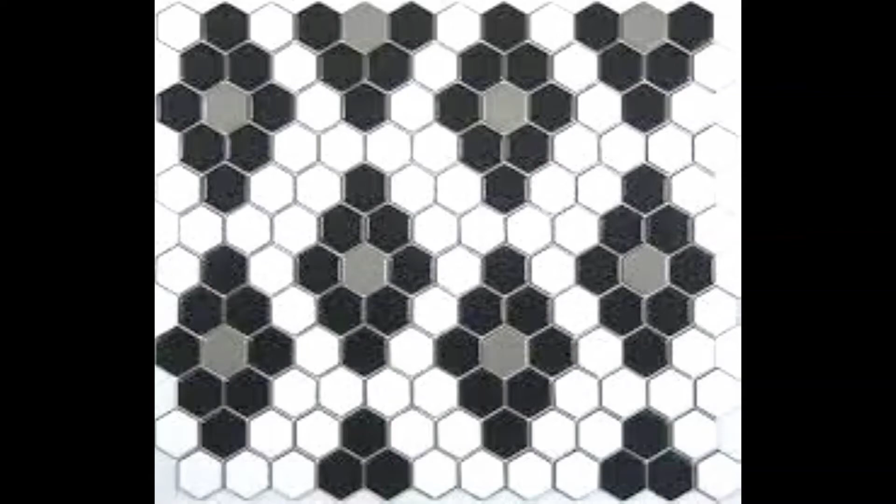In this video, I will be going over this tile pattern and how to recreate it. Our drawing here shows us that we're going to be using a certain command that is called the rectangular array command. This rectangular array command, remember, helps you to duplicate an object or a pattern without having to use other commands such as copy. It also allows you to get through your drawing a lot faster.

Before we can even use the command, we need to create the octagon pattern or shape that we see on our screen here. Now you can create this pattern one of two ways. You can use your line command, or you can be a little bit faster and use your rectangle command, which is the command that I'm going to choose to use. Because I see overall it does have a rectangular shape, but then it has these slashes that are about 1/4 of an inch at 45-degree angles on all four corners if this was a complete square. 1 inch vertical and 1 inch horizontal.

So I'm going to go ahead and use that rectangle command and pick a spot on my drawing screen, and my length is going to be 1 inch and my width would be 1 inch as well. When I do that, I create my rectangle. Now from here, you can choose to either leave it as is, or you can select it and explode it to separate it. So that way you can go ahead and use your chamfer command so that we can put those angles on all four corners.

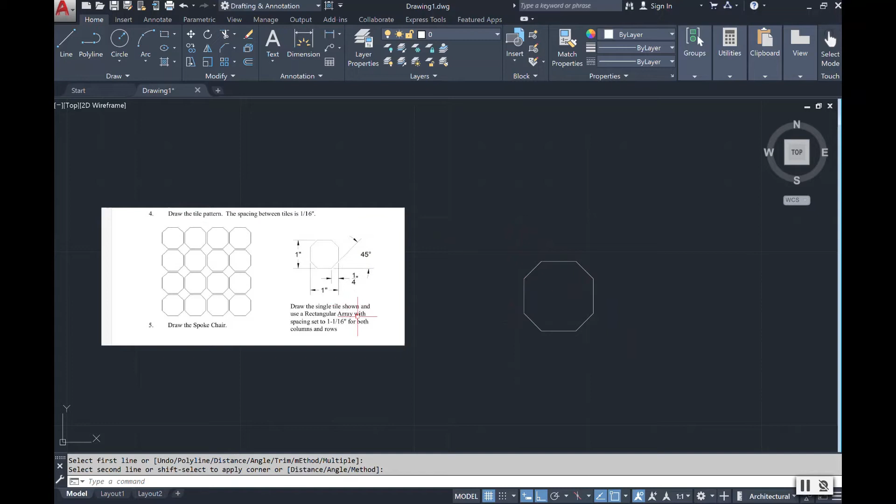Once you have gone around all four sides, and this is the slower way to do it, you can have your shape that duplicates what we have in our instructions here. Now, we can multiply this numerous times. We can go ahead and copy this, or we can offset this as well. But instead of going through all of those commands, we can just simply jump right into the rectangular array command.

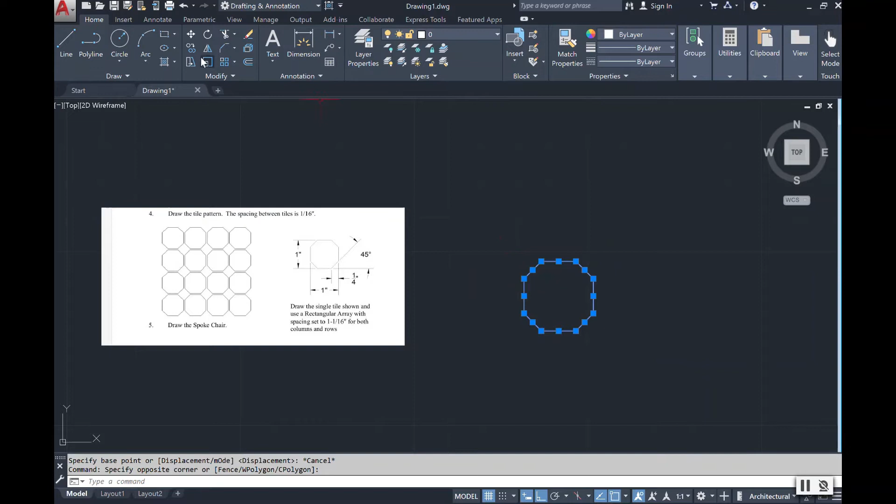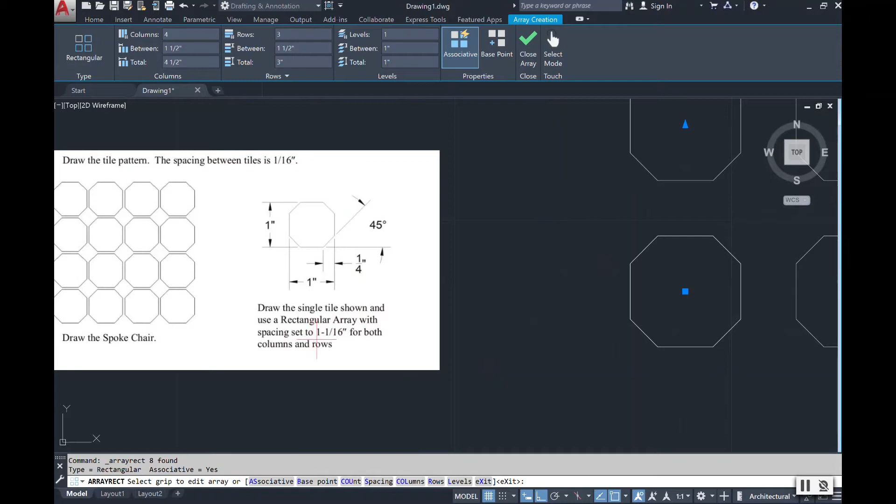And what you would do is select your object. Go to your rectangular array command, left click it, and as you can see, it populates and duplicates on your screen immediately. Now our instruction tells us rectangular array with spacing set to 1 1/16 of an inch for both of our columns and rows. Looking at the top of my screen, this is where we place our columns and rows. We can see that it gives us 4, which is the default for our columns. And then for the rows, it only gives us 3.

But if we're duplicating what is found here, we can change our rows to 4 as well, because we can see that we have 1, 2, 3, 4 rows. So I'm just going to make this change up top to 4, press enter, and now scrolling in and out of my drawing, I have 4 columns and 4 rows. But now we need to get that spacing down. We said that our spacing is 1 1/16 of an inch for both the columns and rows. So this here, where it says between, is that spacing.

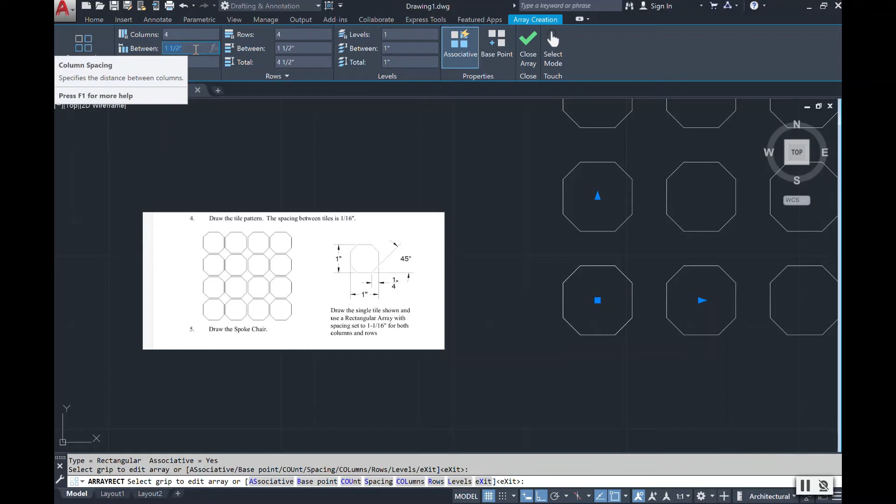So we're just going to type in 1 1/16 of an inch, press enter, and notice that our columns came closer, and now we need our rows to be closer.

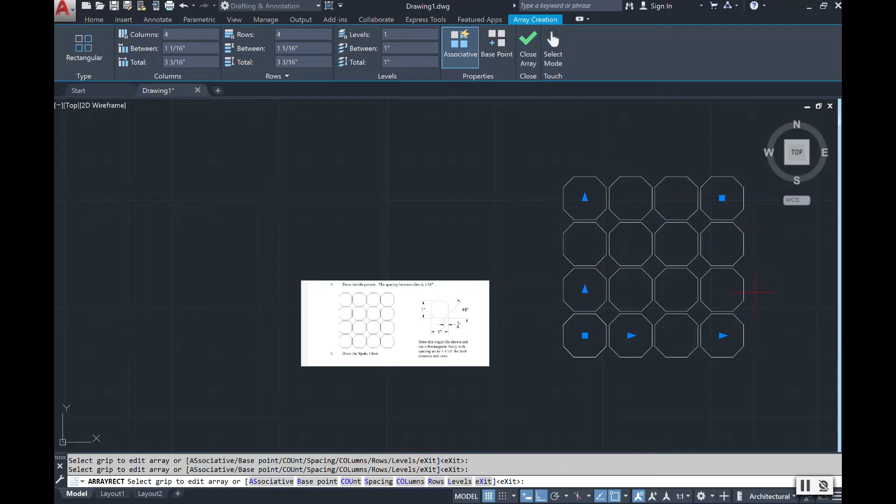So we're going to go in here and manually type in that change, 1 1/16 of an inch, pressing enter, and see how the drawing automatically jumped to what it needs to be. Once you are all complete, you can go ahead and press right click and then enter, or tap enter to come out of the command, and you have your finished product.

Now that we have this tile pattern drawn, I want to show you another way that you can achieve this pattern. And notice the difference. I'm just going to move this out of the way here. Notice the steps, but also notice how long it's going to take to create. We can still do it fast in the beginning, but repeating these patterns can be a little tedious without using that rectangular array command.

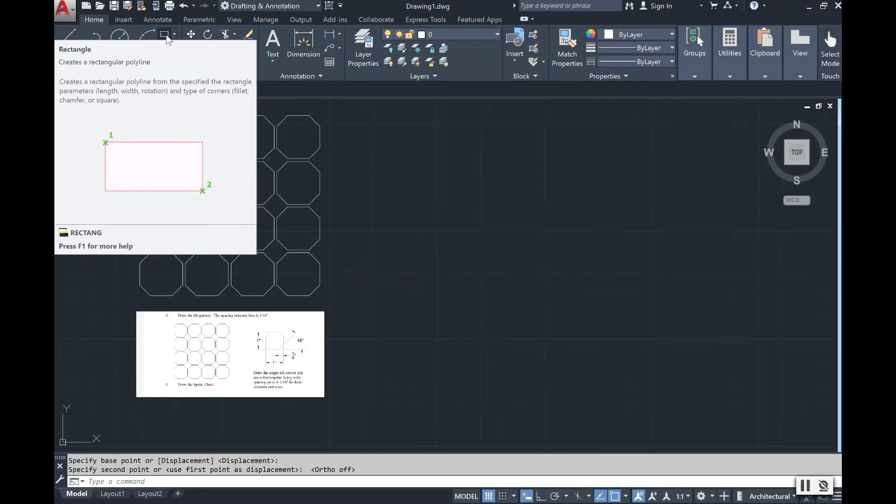Again, I'm going to select my rectangle, pick a point, and I'm going to type in that dimension, 1 inch for the length and then 1 inch for the width. So I have that rectangular shape to get me going, and I can jump immediately, without even exploding this and breaking it up, to my chamfer so that I can put those angles on.

My angle is still the same. The length is 1/4 inch, and that angle line is 45. Pressing enter, and I can make my way around my entire drawing. Again, I'm just staying in that command by pressing enter to come back into it, keeping my length and my angle the same. And now voila, I have my shape yet again.

Again, as I was mentioning earlier, you can go ahead and use your copy. Select your object, press enter, and it's telling me to specify the base point or the displacement. Well, we know our displacement, we're going to type in D and put in that measurement at 1 1/16 of an inch. Now here I just dropped it on the side of it. Let me go back and undo.

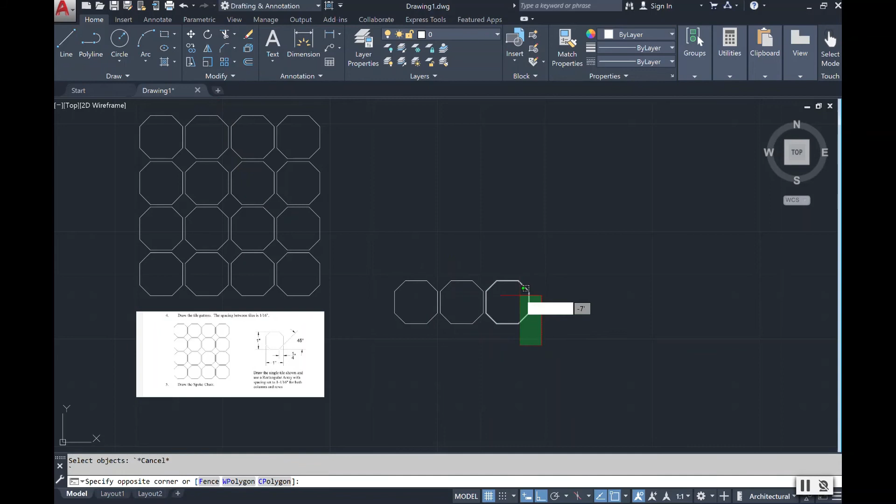But when we used that rectangular array command, I'll use it for this one here again, it just jumped right into it. It gave us some to get started. If we want to have more columns, we add more columns. If we wanted to have less rows, then we subtract rows right here at the top. And then we go ahead and put in whatever that spacing is to achieve what we're looking for.

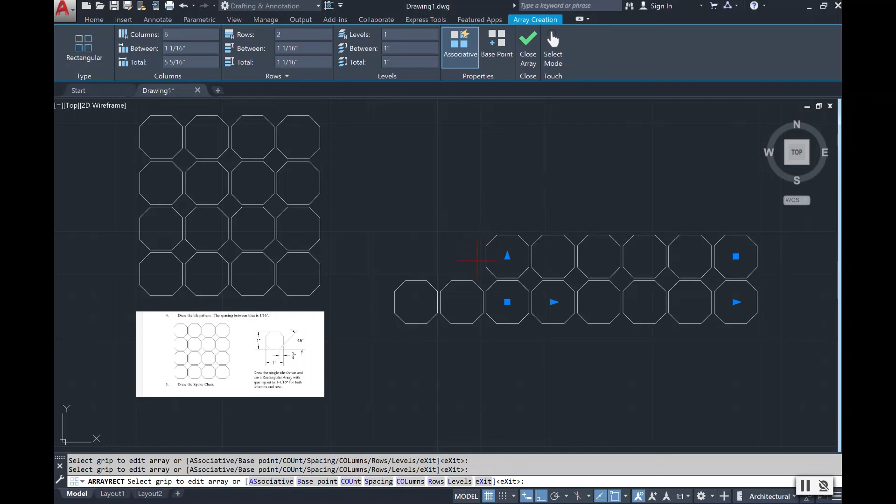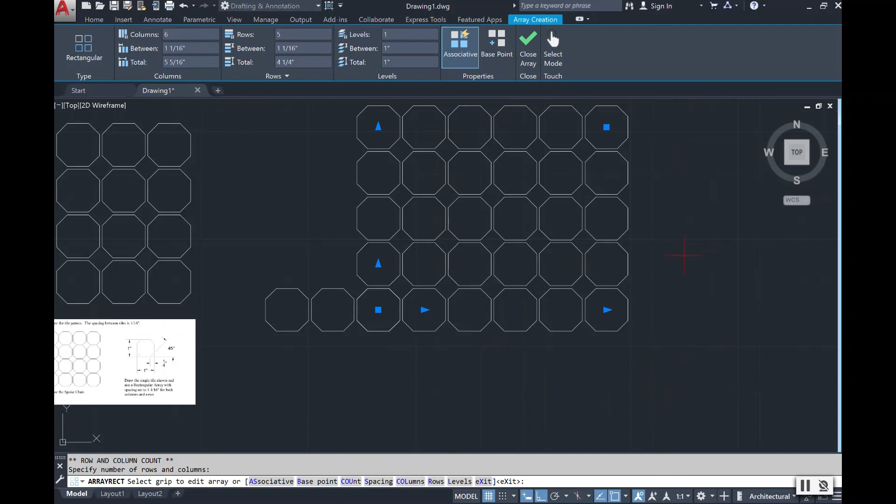Remember that when you have your rectangular array command open, you can manually put your columns in, or you can use your blue grippers to grab and duplicate them as needed on your screen. I really hope this video helps you to understand how to use your rectangular array command.

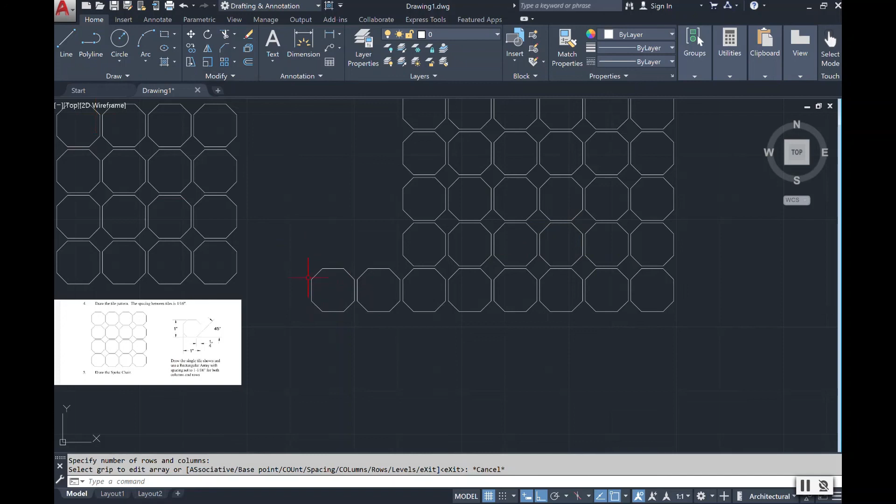This is extremely helpful if you had things such as mosaic tile or a backsplash in the kitchen or in a bathroom, and you don't want to constantly draw all of these shapes multiple times. You can just draw it one time. Use that rectangular array command to duplicate it, and expand it by using your grippers or your arrows to stretch it out.